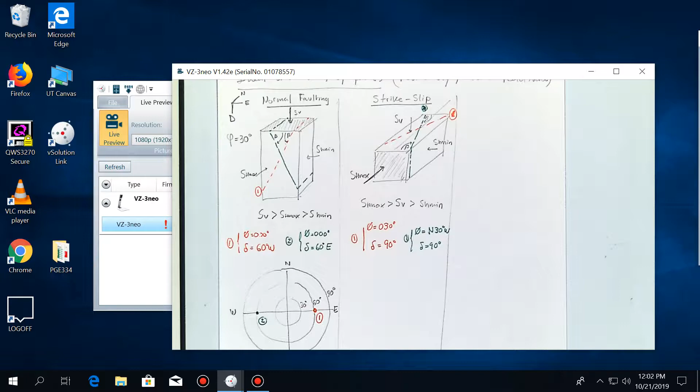So this is just the first midterm. There is a chance to make it up, with other midterms, with the final exam, with homework, and with participating in class. So if you didn't do that well this time, there is still time to make it up, okay? But many of you did very well, and I'm happy for that. There were some common mistakes, and I will talk about that on Wednesday.

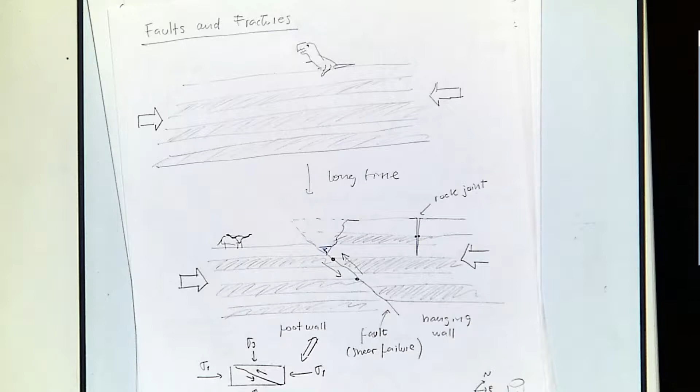All right, so just as a reminder, we have been working on analyzing and better understanding how faults form, and if you were to change the stresses or pressure, if they were to reactivate or slip again. This is very important because many times when these faults are close to failure, they are more likely to be hydraulically conductive. So the permeability of the fault is linked to what the state of stress is. If you have a fault that is currently moving very slowly but moving, it's very likely that fault is also going to conduct fluids through it.

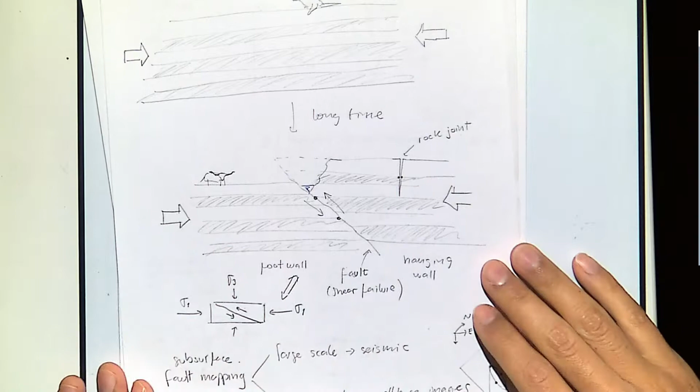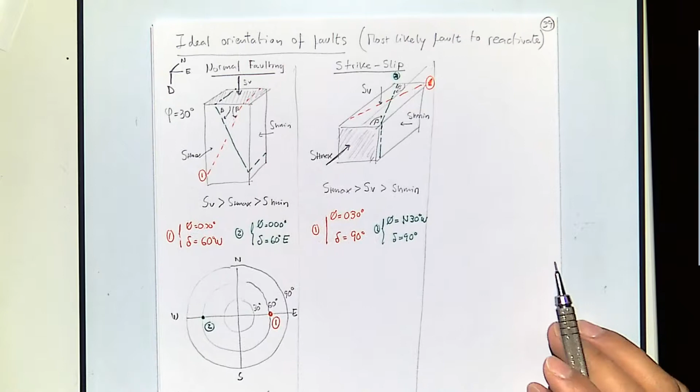If you have a fault that is static and not moving, and probably there is clay inside the fault, probably that's going to be a sealing fault. But stresses are going to be a big part of that mechanism of knowing if the faults are conductive or not. We learned the geology part, we learned about the strength of the faults, and now we're trying to understand, according to each faulting regime or stress regime, which of the faults are more likely to form or more likely to reactivate.

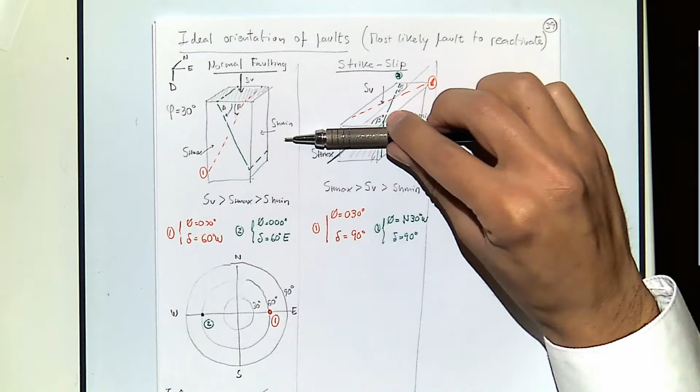And we saw the case of normal faulting. When you have normal faulting, because maximum stress is vertical and minimum is horizontal, in this particular direction, the faults more likely to reactivate are going to be steep, with a strike perpendicular to the minimum principal stress. This is how these look on the Stereonet map, and this is how the Mohr circle looks. Today we'll talk a little bit more about the Mohr circle, so don't worry about that for now.

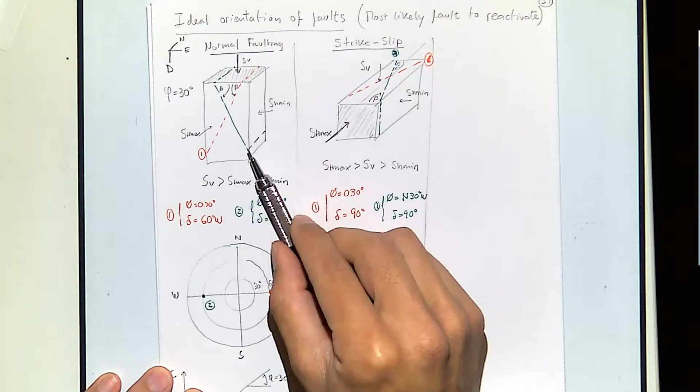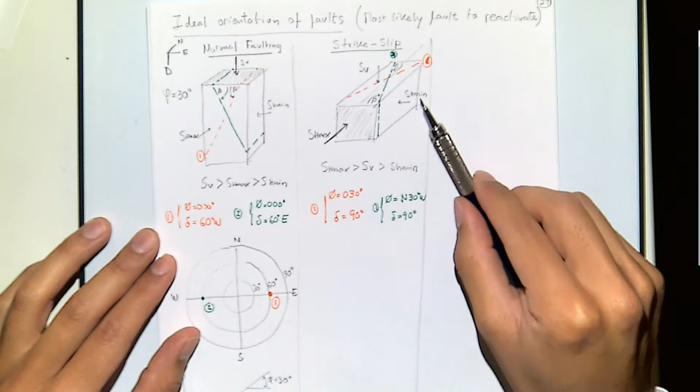The important part here is to quickly identify what would be the plane of maximum shear to normal stress, which is equivalent to saying, which plane will have a fault, or in which it's most likely that if a fault already exists, it reactivates. This is the case in normal faulting. For strike slip, it's exactly the same thing, but now the plane of maximum stress is horizontal.

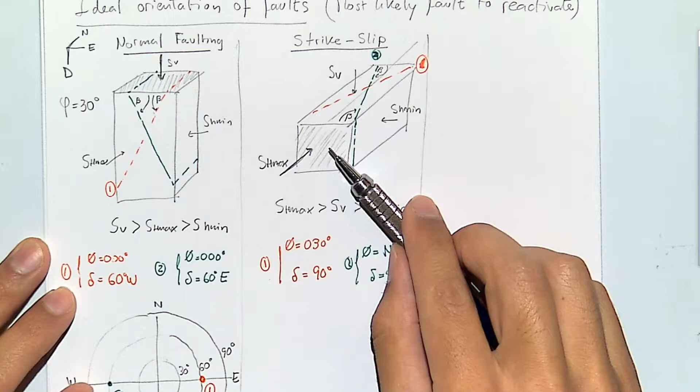The stress in the horizontal direction, and the plane on which maximum horizontal stress is applied is going to be this one. And the faults most likely to reactivate or form are going to be steep planes with respect to this plane, and the same rule holds, with angle beta being this one.

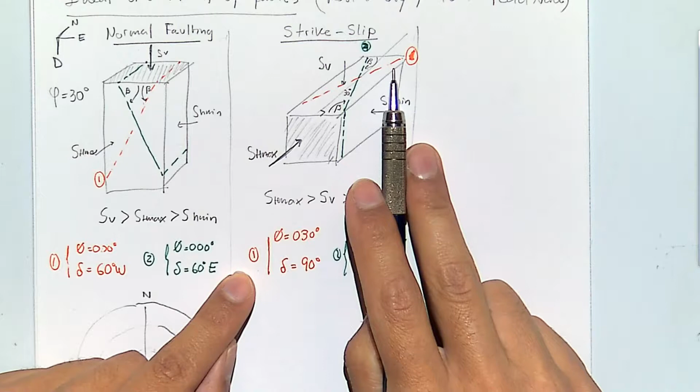So for these two faults, 1 and 2, we measure this strike and dip. Notice that if this is beta, if this is 90 degrees, and beta is 60, this angle has to be 30 degrees. That's why we have 30 degrees from north to west, 30 degrees from north to east, and the dip is going to be 90 degrees.

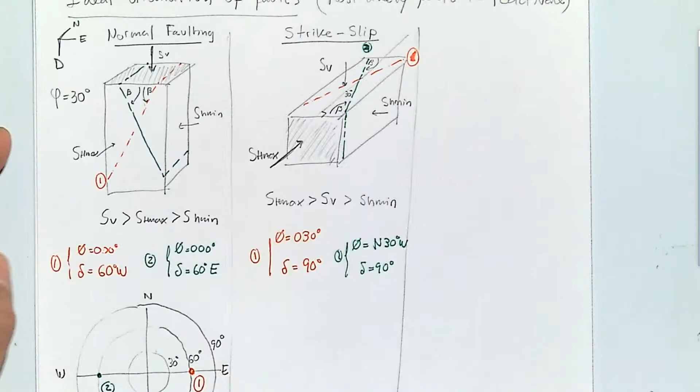Notice that this angle beta is always the same when you follow this rule — it's the angle between the plane of maximum stress and the plane of the fault. But depending on which stress regime you're in, it means different things. Here it means dip; here it affects strike, not dip.

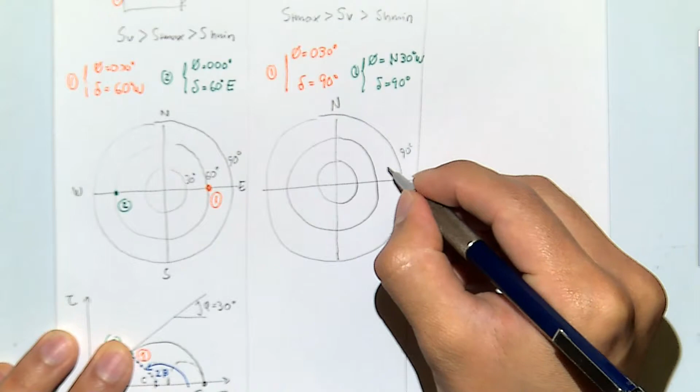All right, so let's continue with this characterization, and we're going to put here the Stereonet map. Remember, this is north. This is 90 degrees, 60 degrees, 30 degrees, and 0.

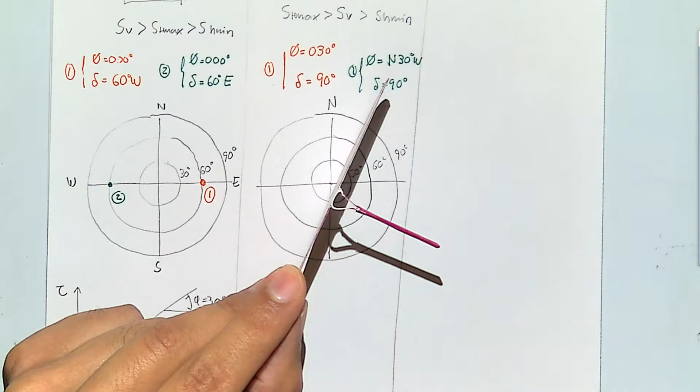So the plane number 1, I'm going to use my graphical tool — number 1 is this one, right there, and it has a strike of 30 degrees. So the tip is going to be pointing right here. Remember, the point you plot is not the strike of the plane, it's normal to the plane.

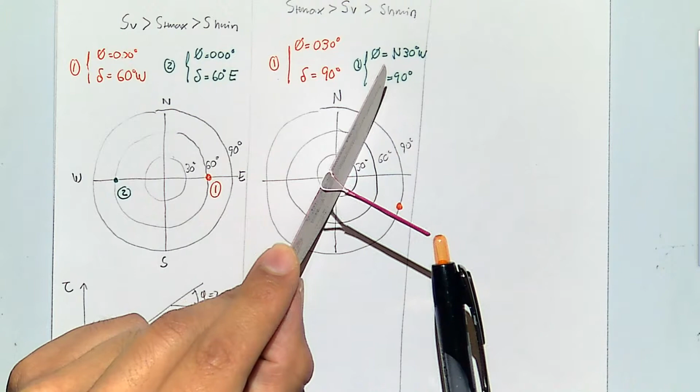Because in this particular case it is 90 degrees, there is no way to tell if I have this case or that case. So in these cases, what we do is just draw two points. So number 1 could be either here or there.

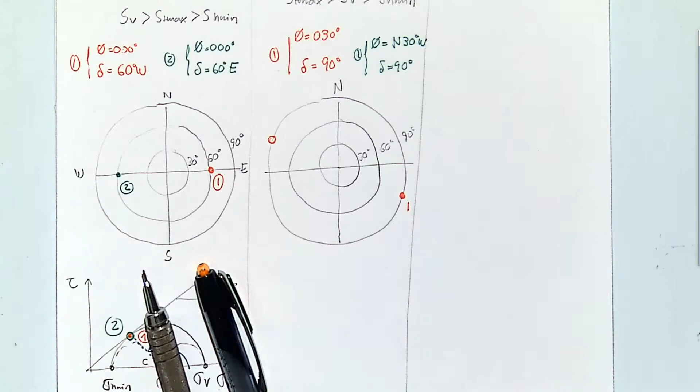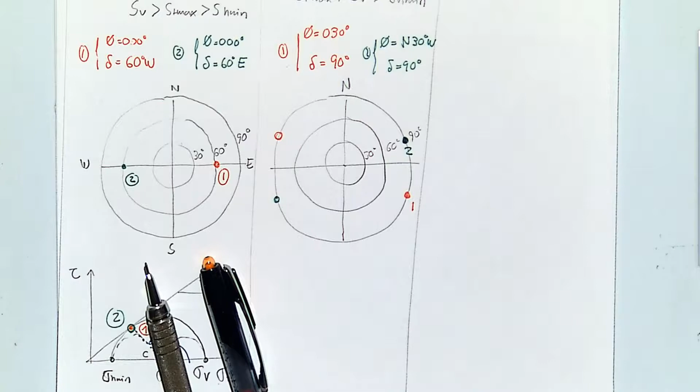And number 2 is going to be this one. So it's going to be either here or there, and this one is going to be number 2. With dip 90 degrees, the point is on the outer edge of this Stereonet projection.

In the 3D Mohr circle, the biggest Mohr circle is going to include the minimum horizontal stress and the maximum horizontal stress — sigma h min, sigma h max — and let's assume that somewhere over here we have sigma v. We're going to have tiny circles in between, and points 1 and 2 are over here at the limit of failure.

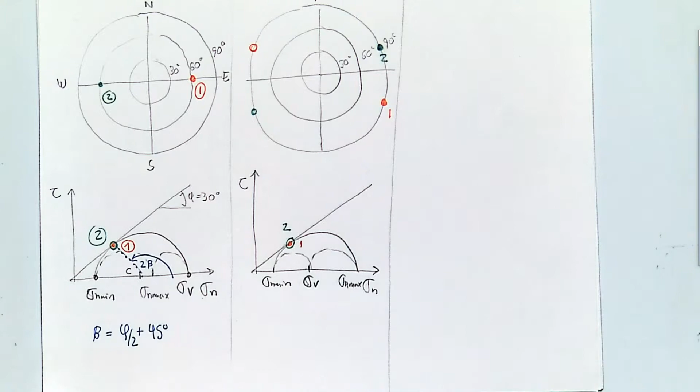And if I chose the center of the biggest circle, this angle will be 2 beta. We'll talk a little bit more about that later on, don't worry.

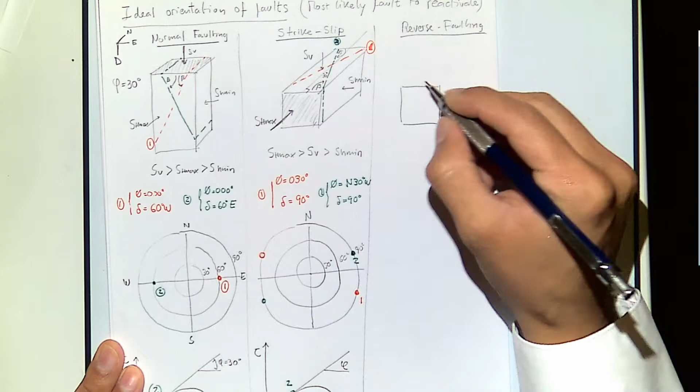All right, and finally let's go to the third case. The third case is reverse faulting, and in this case, the most likely shear plane — what do you think it's going to be? First, which direction is the maximum stress in reverse faulting? SH max, and the minimum is SV.

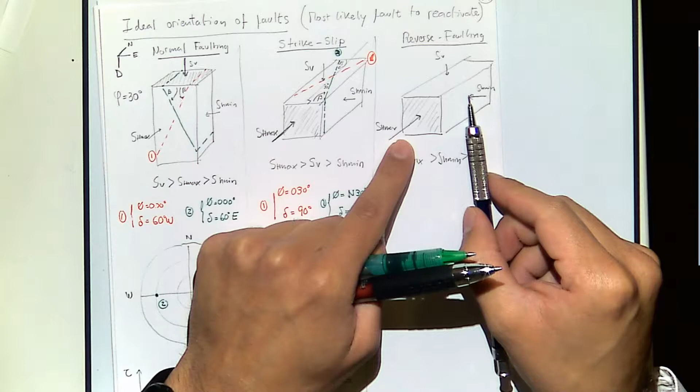Very well. So let's imagine we have SH max in this direction — this is going to be the plane of maximum stress. Let's say we have SH min in this direction, and SV the lowest in this one. Now you have to see where the plane of maximum stress is going to be. Remember, the rule is that the fault, as it moves, is always going to push against the minimum principal stress, which in this case is SV. So if a wedge were to form here, it will push against SV and go in the direction of SH max.

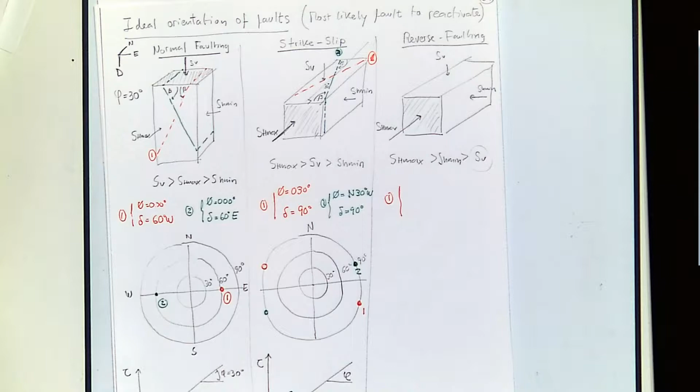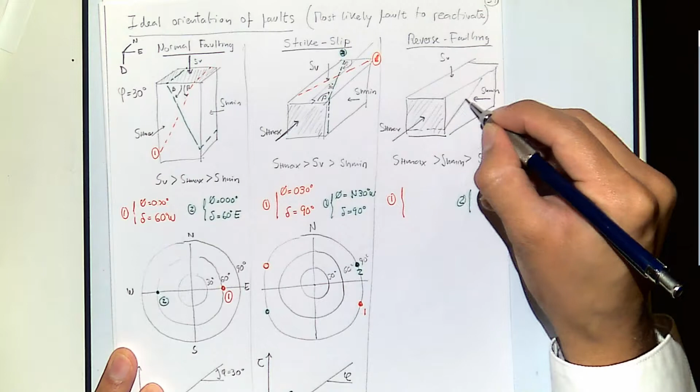So before I make the drawing, what do you think the strike of such a fault is going to be? 90 degrees, very well — it's going to be 90 degrees. Let me do one over here. Let's say it starts somewhere over there, and as you push in the direction of SH max, it forms a plane going in this direction.

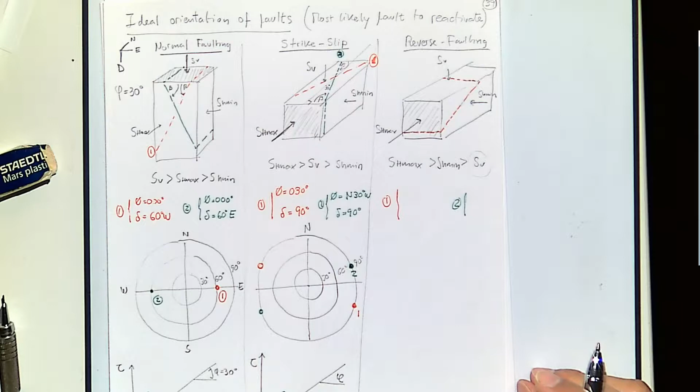Do you guys have any fun story from the weekend? No one? It's a tough game. Did UT win or not? Yeah, but by how many points? Two points, okay. So who is first in the conference then? OU? Okay, still OU.

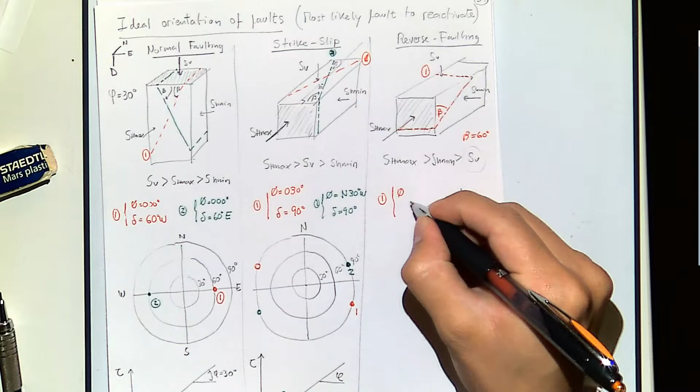All right, so this one is going to be number 1. As you push in the direction of SH max, this moves against SV with an angle here, beta — remember, beta for this example is 60 degrees. This is what's going to happen, and the strike is going to be 90 degrees, or we could say the strike is in the east-west direction. For another one, let's say we're pushed from the back — we could have another fault, the conjugate of that one, going in this direction. You can't see it in the back, but the strike is the same.

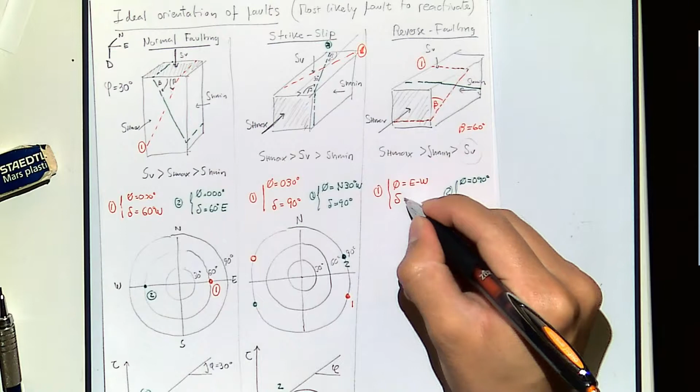And what is going to be the dip of such fault? Let's say number 1. So you know what beta is. Beta is 60, so this is going to be an angle of 90 degrees. Therefore, this is going to be the dip, and the dip is going to be, in this particular case, 30 degrees. And 30 degrees to the south or to the north for this particular case? South. And this one is 30 degrees to the north.

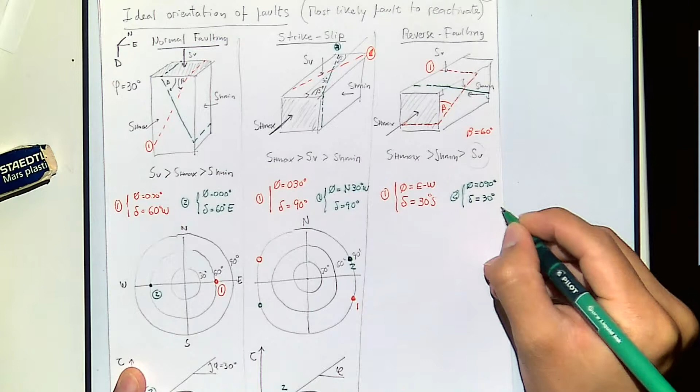So this is everything you need to know about the ideal orientation of this type of faults and how to calculate strike and dip. You may try the same exercise, but with a friction angle of, let's say, 40 degrees, or a friction angle of 25 degrees. And what you are going to see is that in this case what changes is the dip. In this case, it's going to change the strike, and this one is going to change the dip.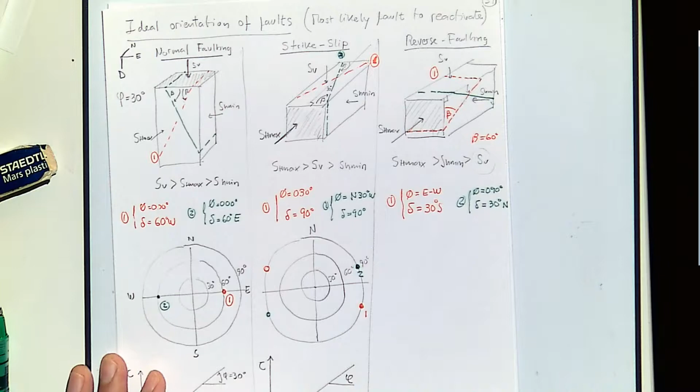You could also have SHmin in another direction other than east-west. It could be direction north-south, or it could be at any angle. We'll talk a little bit more about this at any angle later on when we talk about the homework. But when it is at an angle which is not 0 or 90, it gets slightly more difficult. But if you apply the same principle, it's not difficult to solve.

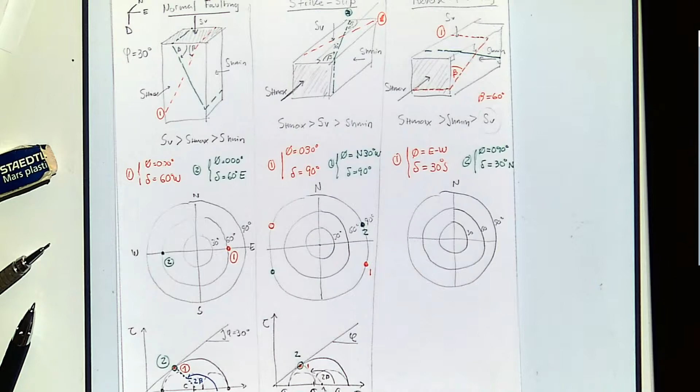All right, so let's just complete the picture for now. Stereonet. And again, this is 30 degrees, 60 degrees, 90 degrees deep. And this is the first fault. Number 1 is dipping towards the south, 30 degrees. So it's something like this. It's going to be a point right here, number 1. And number 2 is going to be the opposite, something like that. And it's going to be right there.

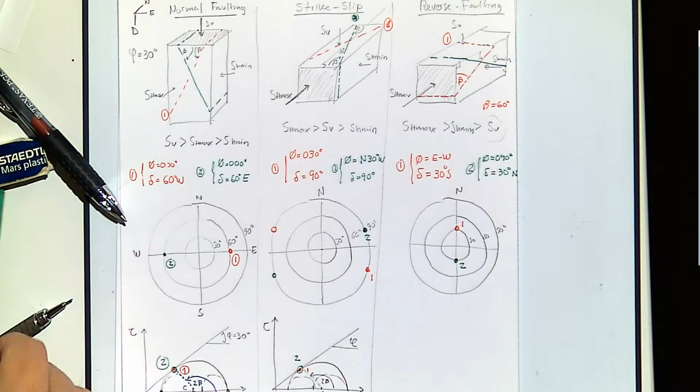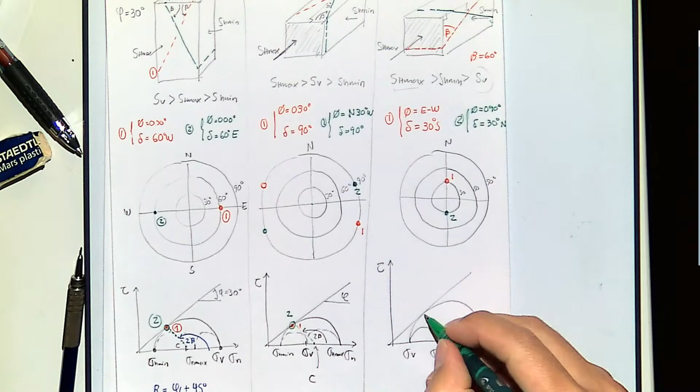And the 3D Mohr circle now is going to involve sigma H max and sigma V, where sigma V is the smallest. So let's say sigma V somewhere over here, and sigma H max somewhere over here. And the 2 points are here, 1 and 2. And if this is the center, this is the angle beta - 2 beta, sorry.

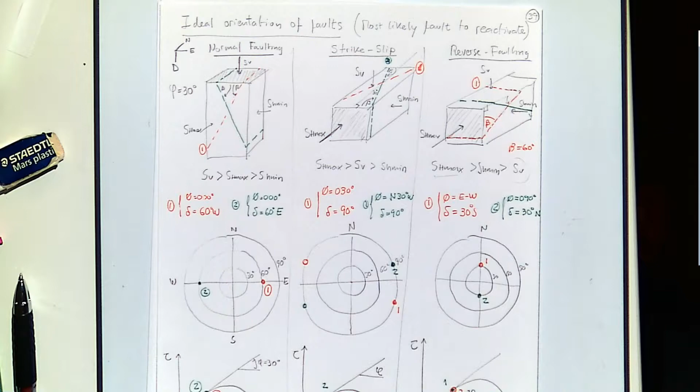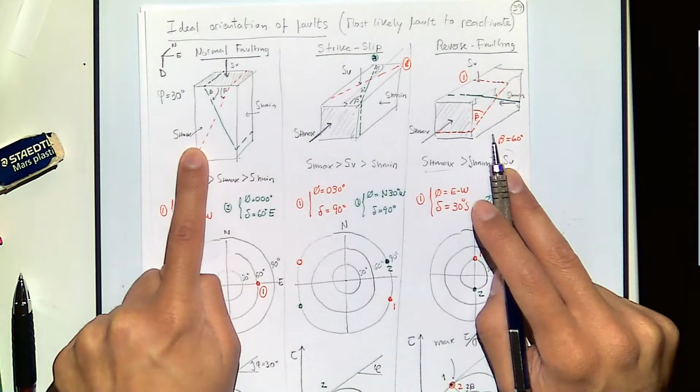Okay, so I think we're done with these 3 examples. Do you have any question about these 3 examples? Remember, what we're trying to see is to find the plane of maximum shear to normal stress ratio. All these points, they share in common that it is the maximum ratio of shear stress to effective normal stress. And at that point is where shear failure is going to happen. There are always 2 solutions for this case. And in normal faulting, they give you different dips. In a strike slip, they give you different strikes. And in reverse faulting, they give you also different dips.

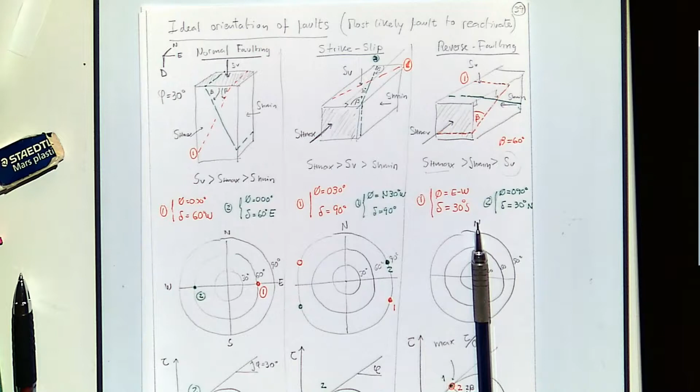And I believe I have an example of strike slip as well. Let me see if I find it. Okay, yeah, this one. All right.

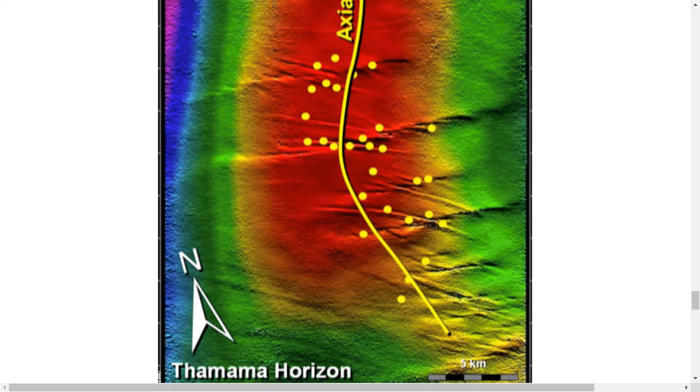I think you're looking at the strike of the fault, but that's not what I'm asking. I'm asking about in which direction SH max is. So for this particular case, if these are the faults, let me move this down a little bit so I can get to that. This is one fault, and actually it's a plane, right? So let me use this. If this is a fault like this, and this is what you're seeing here with those lines, and this is a fault like that, that means SH max is going exactly in the middle of those.

So the direction between north and SH max is about, in this case, 90, let's say 95 degrees, exactly in the middle. Do you see that? Does everyone see that? That's the case?

So this is exactly the same. Let me share the image. So this is what we have over here, and in this case it will be something. I don't know if I can make it, but this is the direction of SH max, right? And in the image it's coming here from the north.

Notice that SH max goes in between the strike of the two lines. And it's the same thing with normal and reverse faults. The maximum stress goes in between those two planes. And here it's the same, the maximum stress goes in between those two.

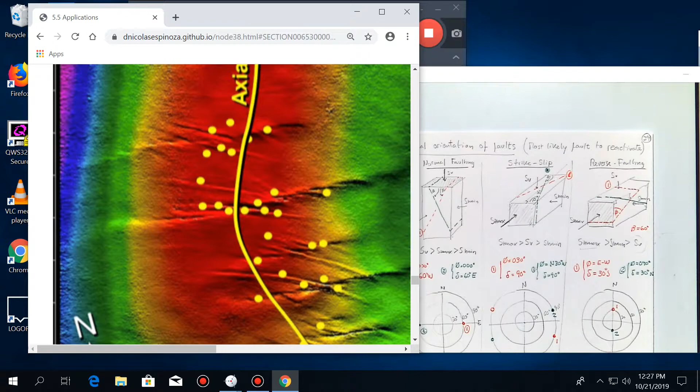And since we are here, let me show you another example that we said we'll talk about in the problems. All right, now let's come back to this case.

Again, for some extra points, people other than Mr. Dodd and Mr. Dohium, tell me—I'm going to tell you that these are faults and they have a steep angle, and the lines are the strike of the faults. What is the direction of SH max? Please raise your hand so I know you want to participate.

You want another chance? Okay, so what is that direction of SHmin? I mean the angle. Let's talk a little bit more specifically - the azimuth, the angle between north and the direction of SHmin. This one's got to be 9 degrees. 9 degrees? No, I'm sorry, but that's not it. It's 135 north, something like that, right?

So in this case, the faults are these planes. No, it's not straight, it's at a dip - something like this, something like that. So this is like that. Those are the lines, here you just see the strike. And this is the direction of SHmin.

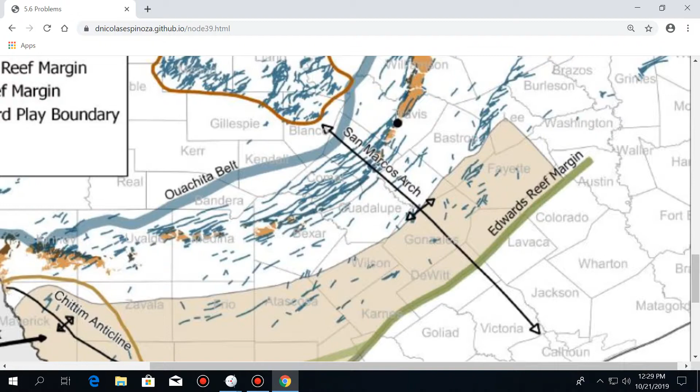The faults go in this direction, and SHmin is in this direction. This is normal faulting, this is in Eagle Ford Shale. So SHmin goes in this direction. And if you check maps about drilling surveys, you will see that wellbores also go in this direction for

laterals and fracturing. Can you explain one more time why it's normal faulting? Well, in this case, I know it is normal faulting, but also I see that the lines of the strike are very consistent. So for example, if we had a strike slip, probably we'll see stuff like this. This could happen also with reverse faulting, okay? But I also told you that these faults were relatively steep.

So that's how we know this is normal faulting because it's in the Eagle Ford play, that's why you reduce the possibility. So in normal faulting, it's like perpendicular - the SHmin is perpendicular to the strike. And are the two in the same direction?

Well, let's take a look at this. Okay, let me bring the map. All right, here we're looking at the first case. And in the first case, SHmin is going in the direction of 145 degrees, and the strike is perpendicular to the direction of SHmin. This just holds for normal faulting, okay?

And if we want to see a last example about reverse faulting, you just can look at some mountain building, and you see that usually you have mountains, for example here, which are perpendicular to the direction of SH max, which in this case is east-west. If you were to go somewhere over here, the direction of SH max goes in this direction, so the line of the mountains is telling you more or less where those faults are forming, perpendicular to SH max. So the strike of the fault will be perpendicular to SH max.

Oh, so like a mountain line is the strike? Yeah, in this case it tells you more or less a strike. All right, okay, let's see what time it is.

We need to talk about the 3D Mohr circle, guys. So probably you remember the Mohr circle from previous classes, but now we'll talk about the 3D Mohr circle and its applications.

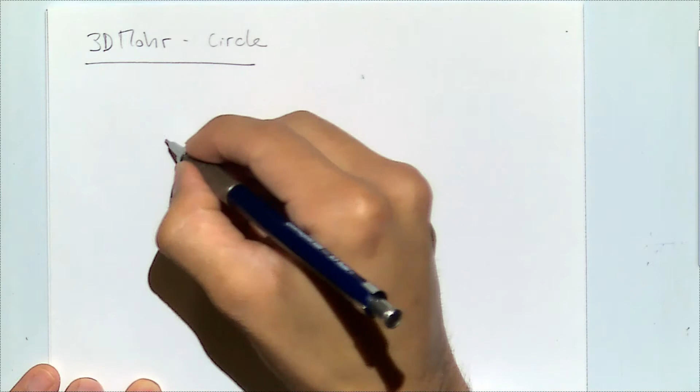So let's imagine a hypothetical 3D Mohr circle. We'll start with the case of normal faulting, but the same applies for any other stress regime. We have three stresses which are not the same, which are all different, because all of these are stresses which are on the x-axis. That means these are principal stresses, because shear is 0 at all these points.

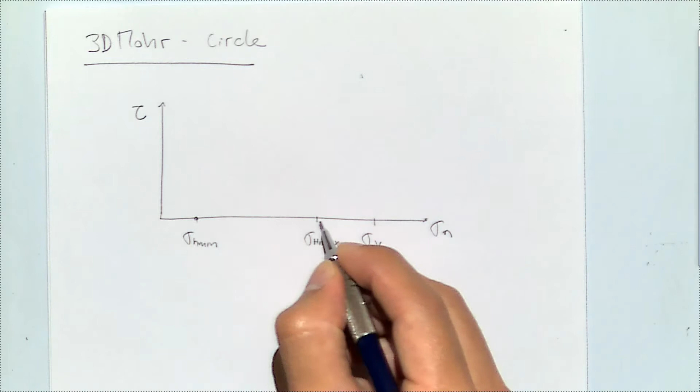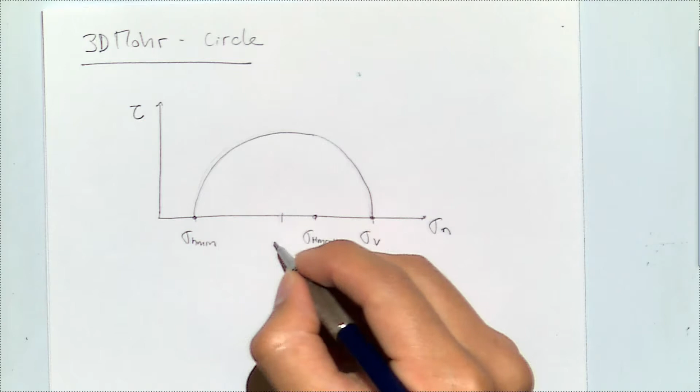So let's see what is the meaning of this. First of all, we know the Mohr circle in 2 dimensions. And if we link the maximum stress and the minimum stress, we'll get that circle. That circle is going to have a center, let's call it center number 1. And now let's see what that means.

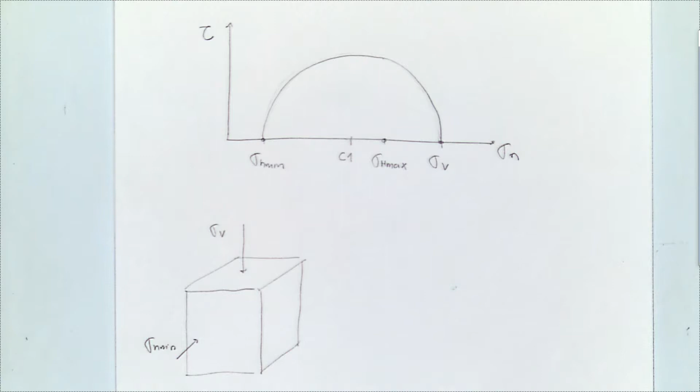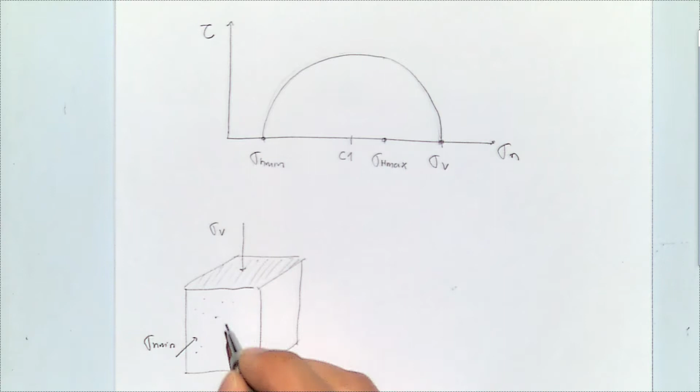We're going to make a block diagram of the subsurface. And here I'm going to place sigma h min in this direction - this is just an example, I'm making it up, it could be in any other direction. And this is sigma v. As you can see, this point is this plane, right? So this plane is that point. And the state of stress on this other plane is this point over here.

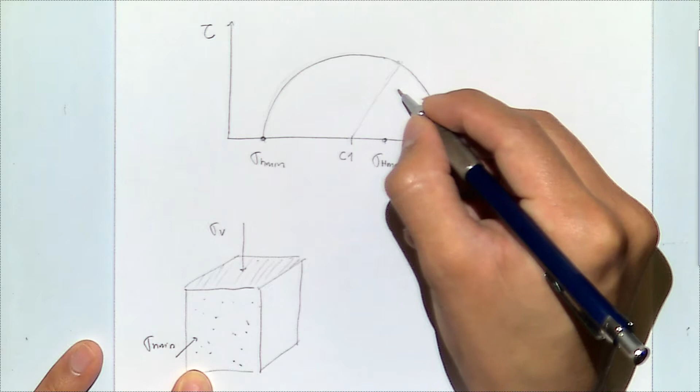The circle that goes from here to there means all the possible states of stresses in this circle, when this is an angle, two times beta 1, going from this plane to that plane. So if this is 2 beta 1, that means that this is beta 1.

And basically, every point in the circle is going to be a plane over here. According to what is the value of the angle, I will get to know what is the stress at that point. For example, if beta 1 were to be 45 degrees, that would be a point right here. And this would be a line somewhere over here and a plane somewhere over there.

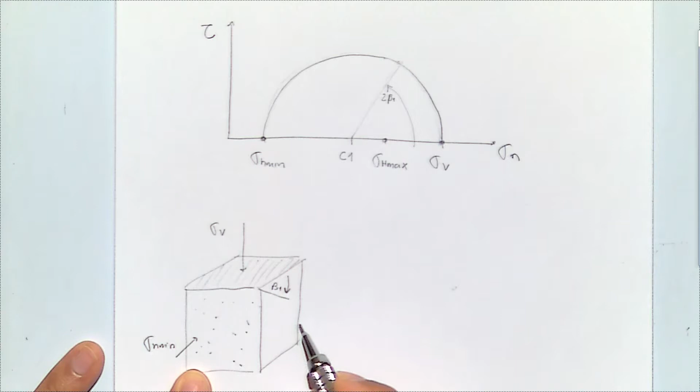But what you have to notice here is that now we are in 3 dimensions, and that adds a little bit more complexity. Beta 1 is the angle that goes from the plane of the maximum stress, in this case sigma v, to the plane of sigma h min.

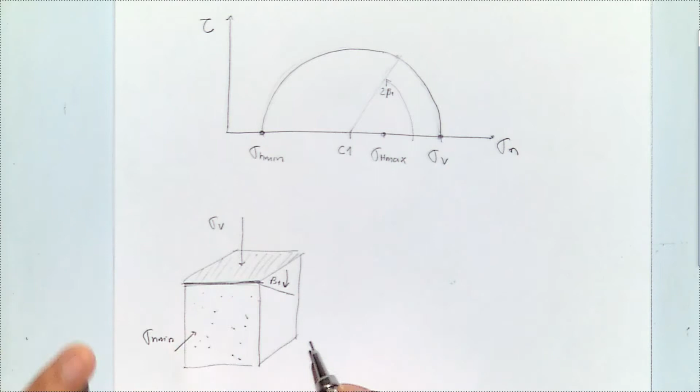But it's also respecting this line. You should think about this line as sort of a hinge that this plane moves on. This is not just a line over here, this one is a plane. And it's hinging on that hinge, and always that strike is the same. And that's where the three-dimensional component comes into the picture.

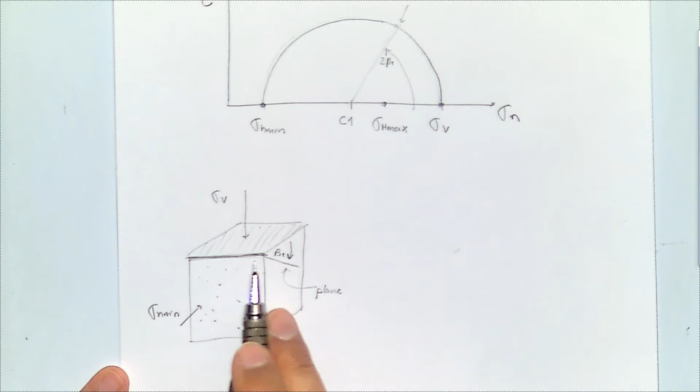When beta 1 is equal to 90 degrees, you go all the way over here and you get to sigma h min. So at this point, if I told you, for example, tell me what is the shear stress and normal stress for a point somewhere over here, given the strike and the dip, you are able to do that. Why? Because you know what is the center of this circle.

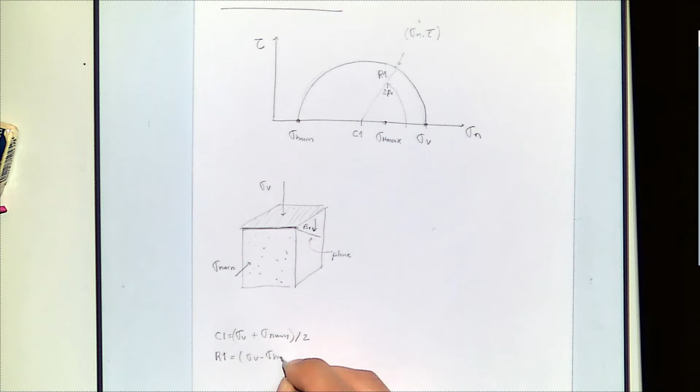Let me zoom out a little bit so I can write the equations. For example, center 1 is just sigma v plus sigma h min divided by 2. Radius number 1 is sigma v minus sigma h min divided by 2.

And in this particular case, any state of stress, sigma n, is going to be equal to the center plus the component in this direction, and that's going to be R1 times trigonometry, cosine or sine of 2 beta 1. I'm looking for this additional amount in order to get here, cosine.

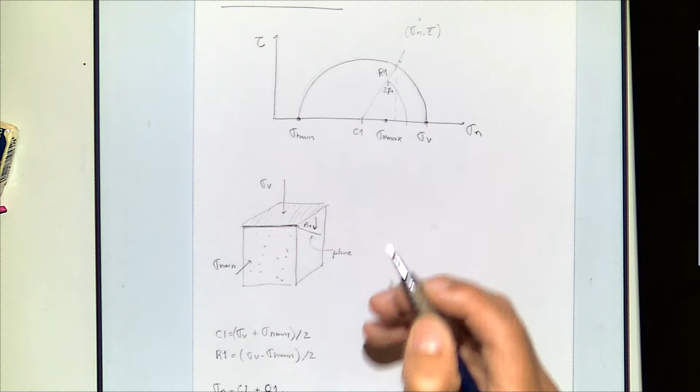Most of you did calculate correctly the true vertical depth in the third problem, but some of you didn't. If you don't remember trigonometry, you should try to refresh that.

All right, that's going to be sigma n, and tau is going to be just R1 times the sine of 2 beta 1. Notice that when 2 beta 1 is higher than 90 degrees, it's going to be a negative value. And then instead of adding something, you're going to subtract that, and it's going to be somewhere over here.

So, okay, then I'm looking at this circle. This is C1, this is R1, this angle is 2 beta 1. And the equations that we get are going to be those two.

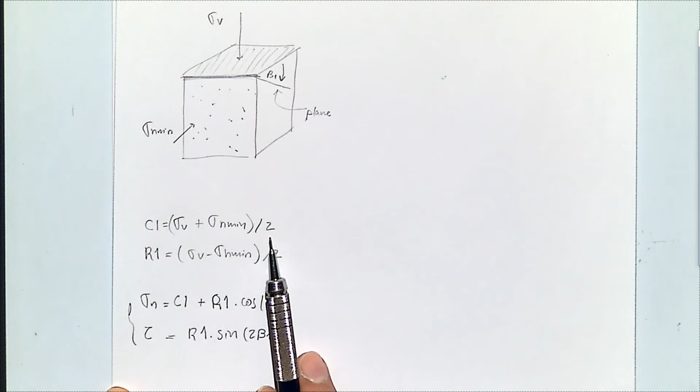Wouldn't the center be that plus sigma h min? Center will be sigma v plus sigma h min divided by 2. What is the issue? Wouldn't that be assuming that sigma h min starts at 0? No, it's just the average between these two numbers. Never mind, yeah, the center of the circle is just going to be the average of those two.

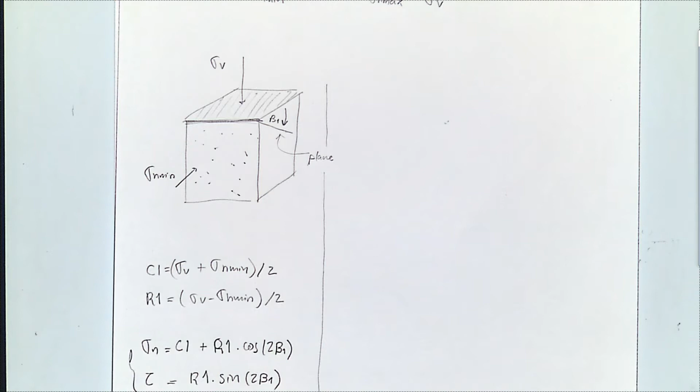The radius is going to be the difference divided by 2. Okay, so again, here are the equations, but this is just saying it's just trigonometry. We want to know what is sigma n and what is tau at that particular point.

So now with this circle, we can get to know all the possible states of stresses from a plane that hinges from the plane of sigma v to the plane of sigma h min. And it's going to be exactly the same with the two other ones.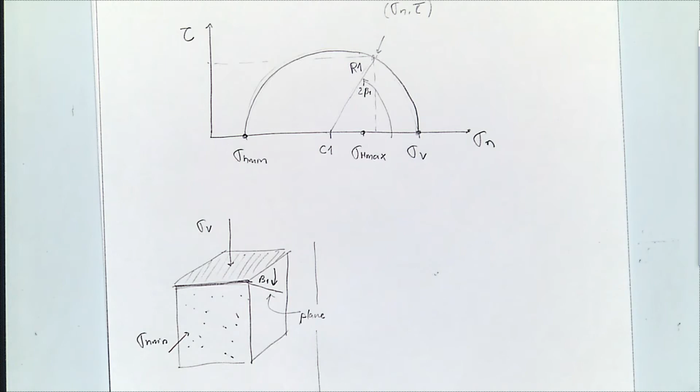So let's do this case. In between sigma v and sigma h max, there's going to be another Mohr circle, which is going to be that Mohr circle. It doesn't look that much like a circle, but I meant that to be a circle. And if we look at what that means in reality, it's the same cube. We have sigma v, we have sigma h min, and here we have sigma h max.

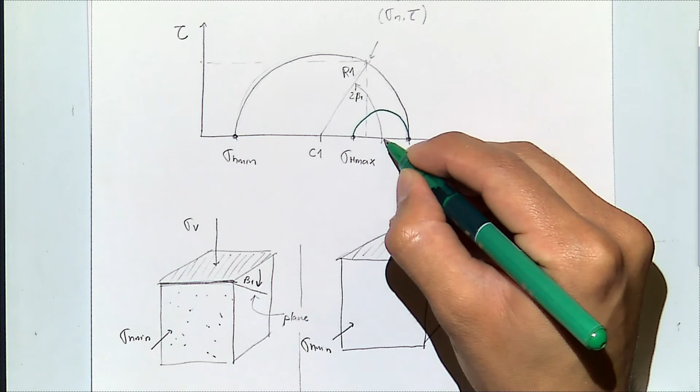Sigma v, the maximum, is this one. The plane of sigma h max is this other plane over here. And that circle is going to mean all the planes in between the plane of sigma v and the plane sigma h max, with a hinge on that line. Let's say, for example, that the center C2 is this one.

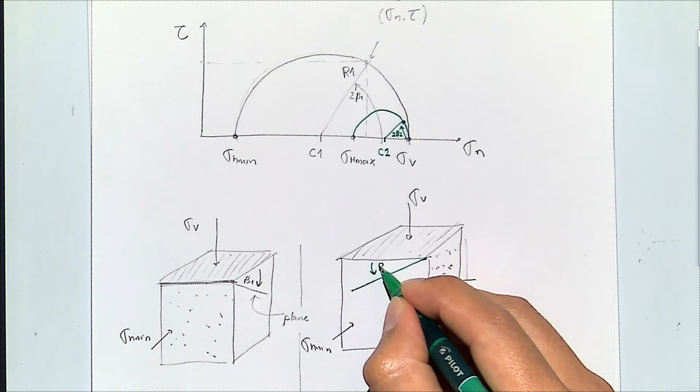So this is going to be 2 beta 2, and beta here is going to start increasing from the plane of sigma v. Therefore, this is going to be beta 2. When beta 2 equals 0, we're on the plane of sigma v. When beta 2 equals 90 degrees, we're in the plane of sigma h max. And everything in between is that plane.

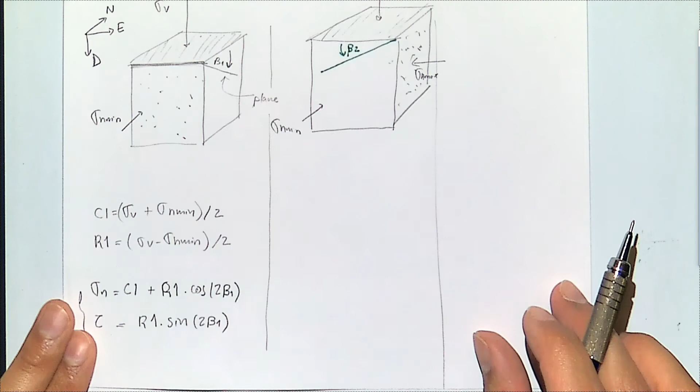So now, if you had a fault with a strike of, in this case, 90 degrees, 0 degrees, then you could solve the state of stress for any fault with any dip, because the equations are relatively simple. Let me just complete this. C2 is going to be sigma v plus sigma h max, divided by 2.

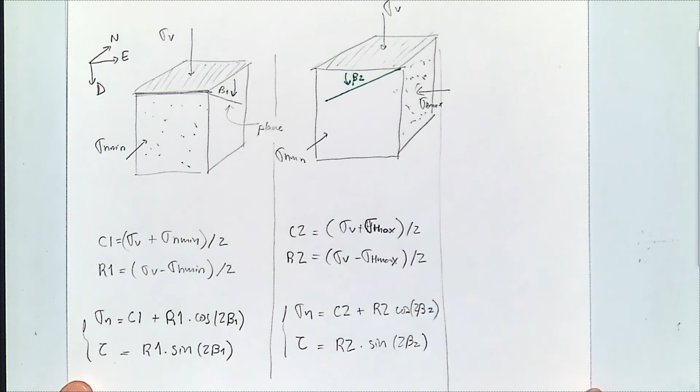R2 is going to be this. And sigma n, tau for these particular cases is going to be C2 plus R2 cosine 2 times beta 2, R2 sine 2 beta 2. Remember, all these equations are also in my notes online, so if you don't have time to copy them all, you can check them over there.

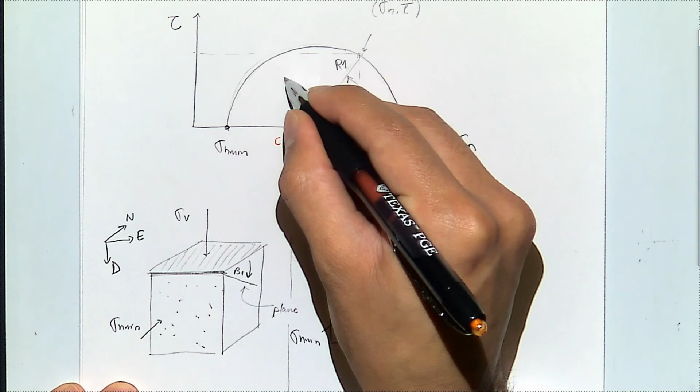All right, so we know the state of stresses for all these planes. And the last one is going to be, let me find the center first. Center is going to be somewhere over here. Same thing as before.

This is going to be 2 times beta 3. And now we're looking at, this is sigma v, sigma h min, sigma h max.

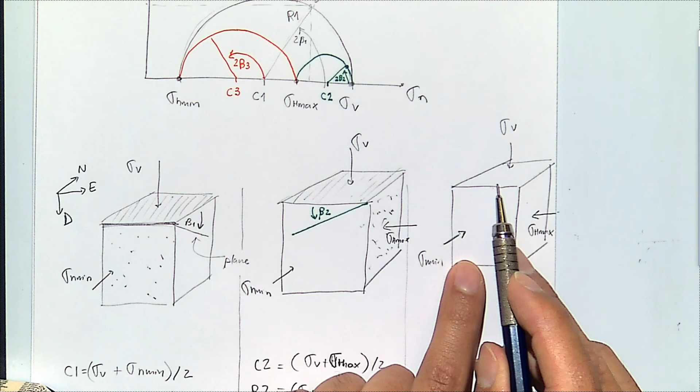Now we're in the circle that links sigma h min and sigma h max. So where is going to be the hinge now? Which line, this one, or that one? The last one, right? And where is beta 3 going to start increasing from? From this line, or from line number 1 or line number 2? Line number 1, right? So the hinge is on this one.

Let's say we did a beta 3, which is a little bit more than 45, so it's going to be this one. This is going to be beta 3. This is the plane of the maximum stress. This is the plane of the minimum stress. Notice that when I say maximum stress, I'm referring to this particular circle. For this particular circle, the maximum stress is sigma h max, and the minimum is sigma h min. It doesn't mean that for the entire block this one is the maximum.

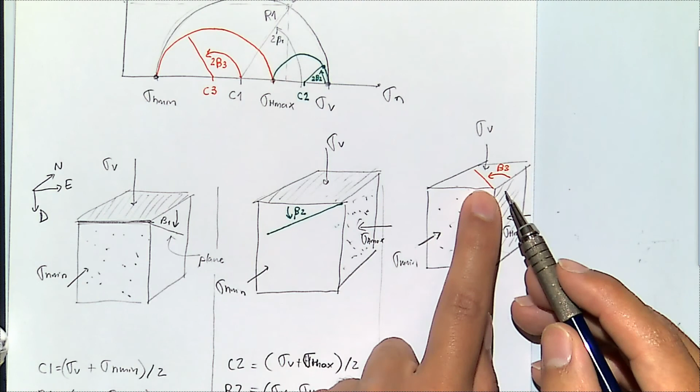But this is it. Now we can get to know, if we knew sigma h min, sigma h max, sigma v, with these simple equations, C3, R3—I'll let you complete that—sigma n, tau, you could tell me the stress anywhere with those angles.

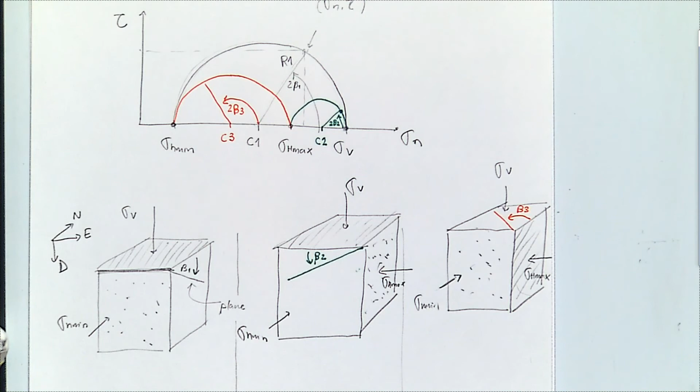But if you notice, for these 3 planes, in every single case, the plane contains one of the stresses. In this case, the plane is in the direction of sigma h max. In this case, the plane is in the direction of sigma h min. And in this case, the plane is in the direction of sigma v. For example, in this case, it doesn't matter what the value of sigma v is—your normal and shear stress just depends on sigma h min and sigma h max, which is that circle.

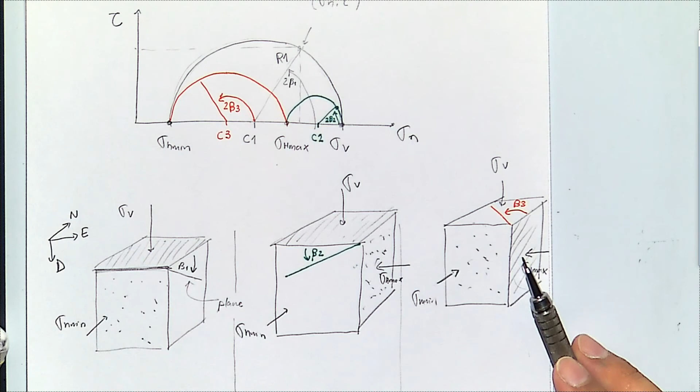And the question is, what happens when you have a plane which is not oriented in such a way that it contains the direction of one of those stresses? What is the stress on that plane going to be? And where in the Mohr circle is it going to be?

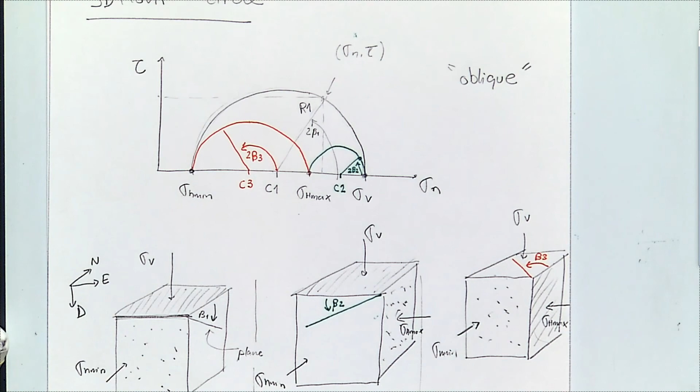Okay, those planes are going to be called oblique planes, and there is no chance that they are outside the biggest Mohr circle, because the principal stress cannot be higher than sigma v, or the normal stress cannot be higher than sigma v. So it cannot be here. The normal stress cannot be smaller than sigma h min, so it cannot be anywhere in here.

Also, it cannot be anywhere inside here, because if I had, for example, a point somewhere over there, that means that this is a principal stress. But we already have 3 principal stresses, so it cannot be anywhere in here, and by extension, cannot be anywhere in there too. The oblique planes are going to be all the way over here, in between those 3 circles.

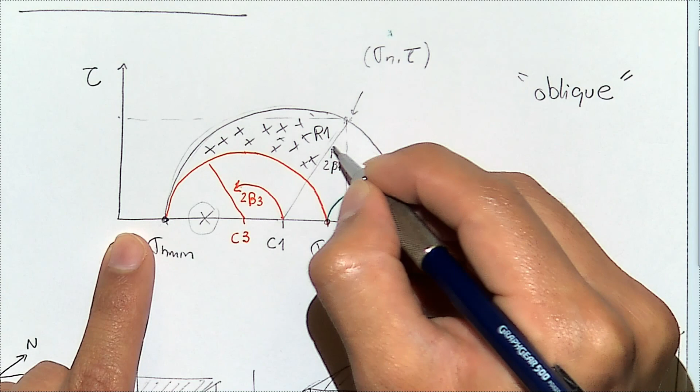And if you want to calculate what is going to be the stress on that particular plane, it's going to be a little bit more difficult, and we'll talk about that on Wednesday. All right? See you guys on Wednesday.